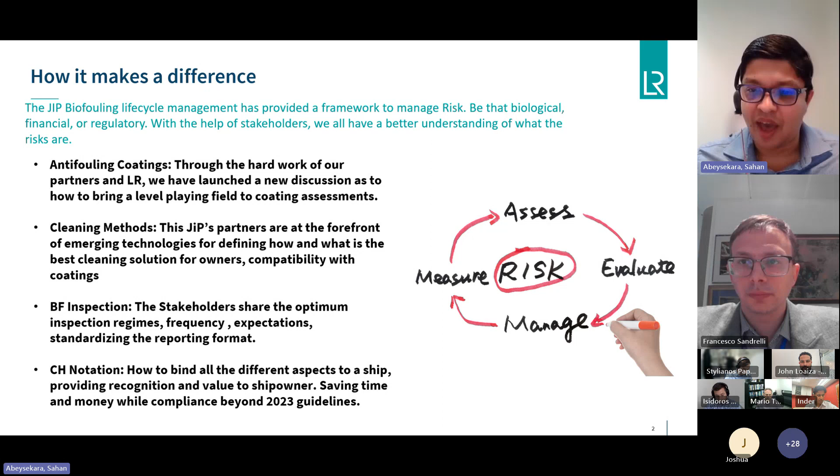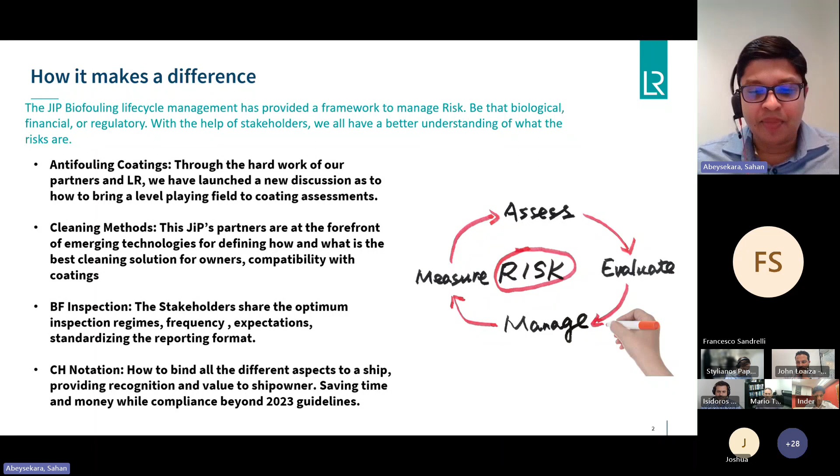That is to provide recognition and value to the ship owner for having such measures, and then to have savings in time and money. Simply put, this requirement goes beyond the 2022-2023 biofouling guidelines. To put that into perspective, a simple illustration of a ship that we have made.

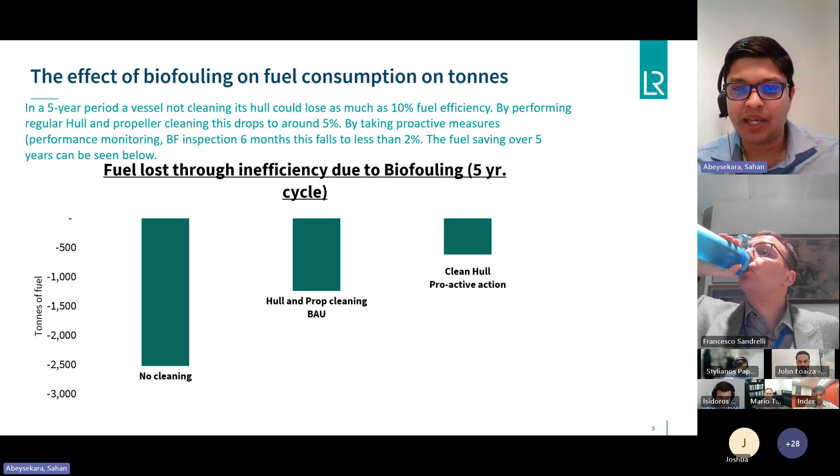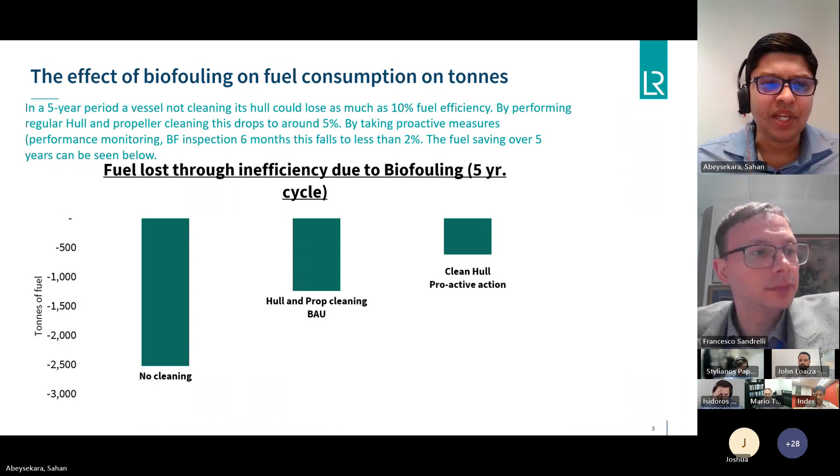This is a tanker with 9,000 tons fuel consumption per year. We mapped out the impact of no cleaning versus business as usual, which is doing hull and propeller cleaning, versus if you have a Clean Hull notation, how much you could save, and converted that into a figure without considering anything else, just totally focusing on the fuel cost.

We used a figure of around 640 per ton, and calculated how much savings a ship owner can get over a 5-year life cycle. This is excluding opportunity cost of hire and probably EU ETS payments - this is purely based on the fuel cost.

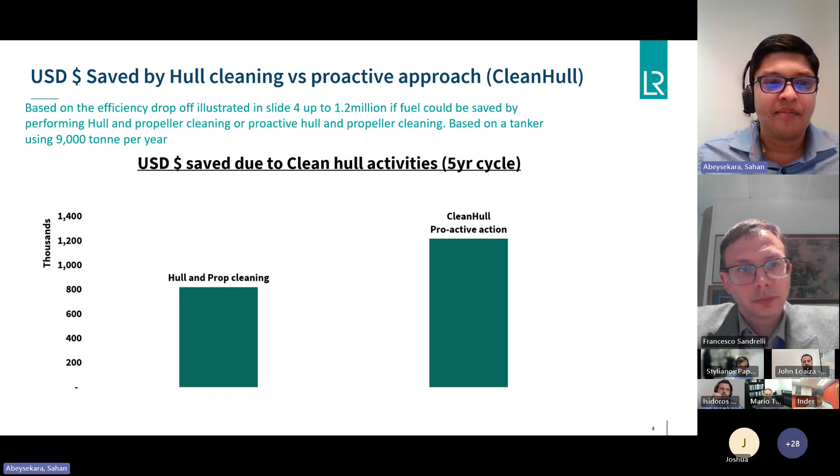Now what we want to do, which is the important part - I think Francesco wants me to share this on this platform - is what is next. So we've done the work we wanted to do and developed that process. Now we want to run it through to see what the savings are, what the findings are. So you probably understood this.

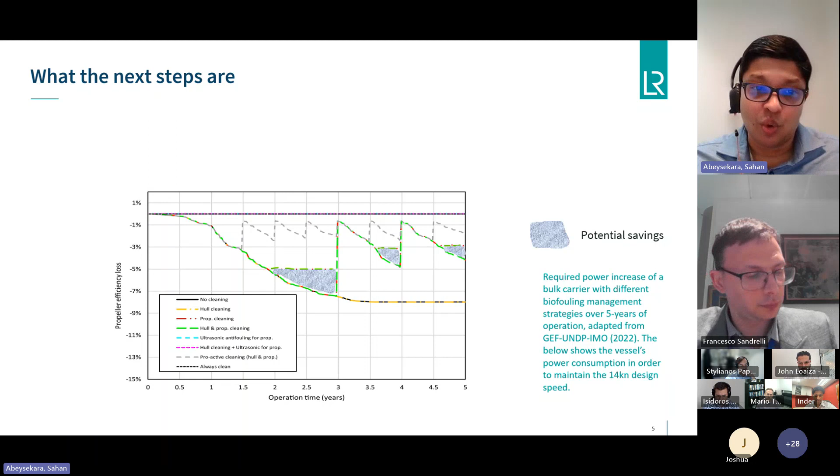So what we want to do right now is go through a trial run based on a clean hull notation, and validate this data to see how much savings you can achieve from the fuel point of view, how much GHG saving you can do, and how much compliance you can achieve from the biofouling management point of view - not just for the 2023 guidelines, but maybe going beyond to meet some regional biofouling requirements such as Australia and New Zealand.

The most important thing we want to bring up from this trial run is the importance of hull fouling and energy efficiency to the energy transition strategy, because we see lots of synergy between biofouling management and GHG emission reduction. In the energy transition strategy and going beyond new fuels, the difference hull management makes could be as significant as the difference between types of fuel, or between using battery power, a fuel cell, or an internal combustion engine.

So we wanted to bring this up to the stage that energy transition needs to take into account biofouling, and also meet biofouling requirements from the prevention of invasive species point of view. Now the trial run is open beyond the JIP partners - anyone interested in participating as a ship owner, paint manufacturer, or technology developer is welcome to contact us, my contact details are there. We want to bring this to the industry to see how we can collectively manage this challenge.

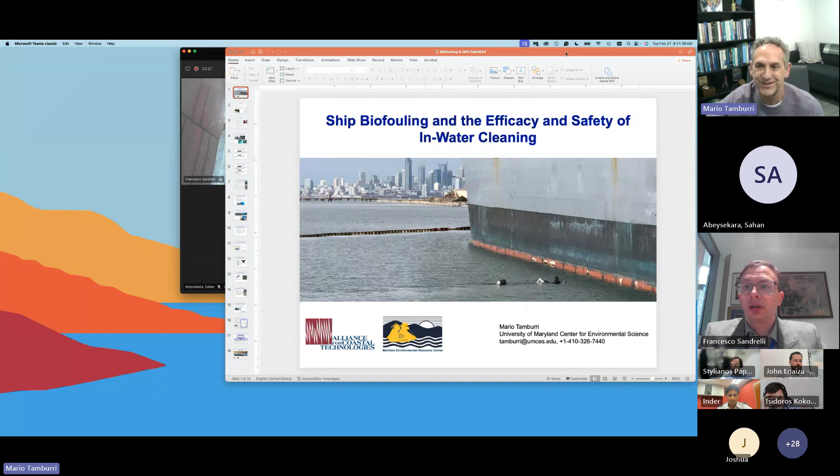Thank you, everyone, it's a great pleasure to be here. I'm going to talk a bit about ship biofouling in general terms, some background, but I'll spend most of my time focusing on work we're doing looking at in-water cleaning systems as a solution or approach to addressing ship biofouling. This work has been done under a couple of programs I run through the university.

One's called the Alliance for Coastal Technologies, and the other is the Maritime Environmental Resource Center, or MERC. But first, some background - I think most of you are fairly familiar with these issues, but to get us all on the same page, you can think about ship biofouling from two different perspectives. There's the vessel operation perspective: fouling, whether it's microfouling - just a slime layer - or macrofouling - larger organisms like barnacles - can result in increased roughness of a ship's hull, increased drag, and resulting increased fuel consumption and exhaust emissions.

Fouling can also interfere with the piping systems of ships - it can clog fire systems, cooling water systems, and the like. So it's a large operational concern that the shipping industry has been addressing for many, many years.

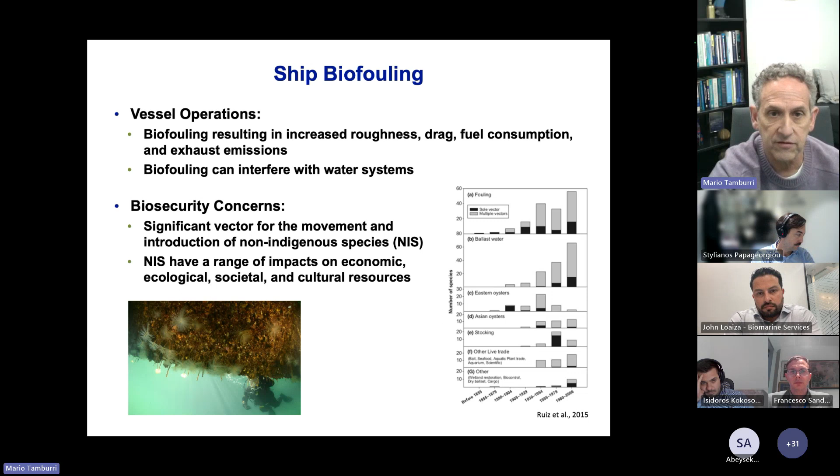The shipping industry has traditionally fought biofouling through anti-fouling systems or coatings. Most prominent now are various coatings designed to prevent macrofouling attachment, things like biocidal coatings using copper or zinc to deter growth on the surface. These biocidal coatings are probably most prevalent - around 80% of ships use those - but there are also other alternatives.

There are coatings that reduce adhesion of organisms to the surface - they're fouling release, or non-abrasive hard coatings. So organisms, if they grow there, will get sort of removed, sloughed off as the ship moves through the water. While these coatings are very effective, they're far from perfect. They typically have about a 5-year service life, but they don't necessarily prevent all biofouling accumulation on all ship surfaces consistently over time.

So there are some problem areas. Biofouling tends to increase on coatings as they age, and if ships stay in stationary locations for extended periods of time, if they're at anchorage or they're laid up for some periods. There are also substantial areas on the ship that are more prone to fouling, and that's because they cannot be painted, things like anodes, or they're more prone to damage or scuffing, like the bulbous bow or tug and fender points and anchor chain areas and so on.

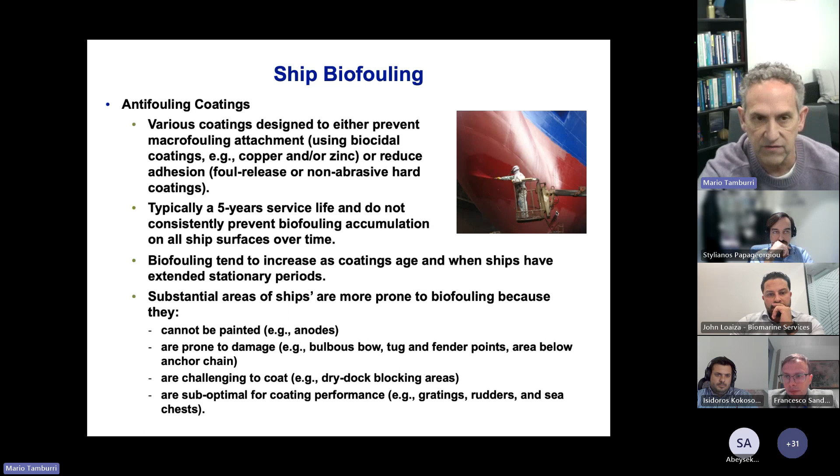So because of these limitations, there's been a lot of effort of ways to augment the coatings, make better coatings, or something else we can do in addition to just the 5-year coating cycle. And that's where in-water cleaning comes in.

In-water cleaning of ship biofouling has a long history. You could argue that in the wooden sailing ship days, we did in-water cleaning through careening. They would pull ships over on its side and scrub the organisms off the bottom of the vessels. Of course, with the advent of steel ships, this became challenging, but there were still attempts to, at the least, scrub organisms off the side of ships at the waterline.

With the advent of scuba, access to the hull became a lot greater, and so there were very simple scrubbing and scraping approaches done on vessels, and that evolved into more mechanized sort of cleaning with a spinning brushes kind of approach.

It became apparent, though, as we moved into these sort of cleaning operations underwater, that this might have problems associated with it. These organisms we're knocking off might themselves be alive and cause invasions. And by doing this, we might also be releasing some of those biocidal materials like the copper and zinc I mentioned earlier into the environment, which could cause problems.

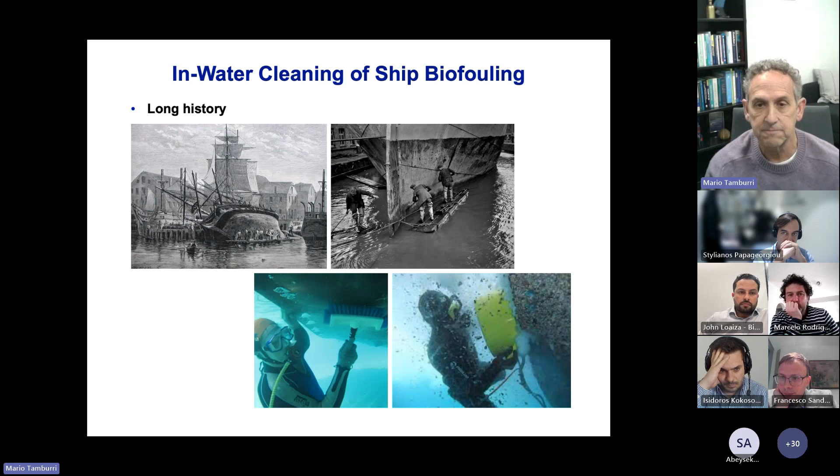So this has led to what I like to refer to as a new generation, or next generation, of in-water cleaning approaches, technologies, and systems that are designed to be a bit more sustainable, perform the function while being less impactful on the environment. And you can think about these in-water cleaning systems as a continuum, but there are two ends of the spectrum.

On one end of the spectrum is what we call reactive in-water cleaning, to remove existing macrofouling - again, existing large organisms like barnacles and macroalgae or mussels and the like. So you're reacting to when they're already there.

And this approach is now being morphed into cleaning with capture. So what you can have is a cleaning unit that has spinning brushes or water jets. It can be remotely operated or diver driven. And these things typically have a shroud, a skirt around the outside of it, to entrain all the material being knocked off the ship, and then some sort of suction approach to bring that waste material, that debris, to the surface for processing, where the solid material is brought off to a landfill, for example, and only clean water returns back into the environment.

On the other end of the spectrum is what we call proactive in-water cleaning, sometimes referred to as grooming. And this is to prevent that macrofouling from establishing. And you do that, again, through a cleaning cart. Again, it can be ROV, it can be diver driven, it can have spinning brushes or water jets.

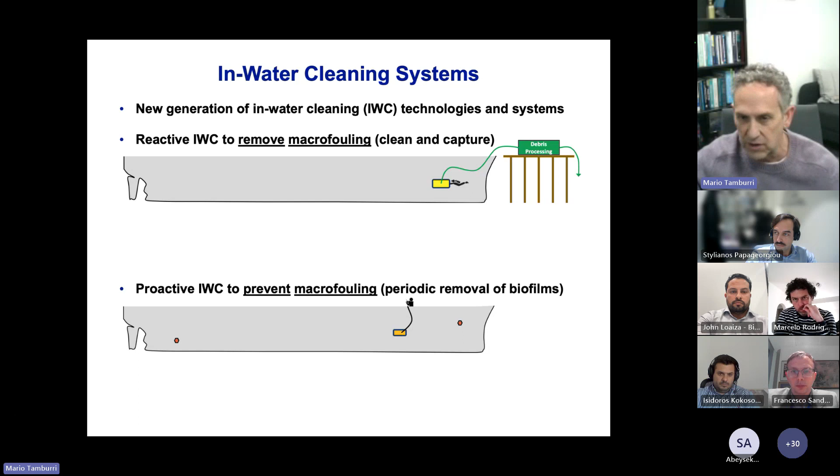But what our real questions have been over the last few years is how effective and safe is this activity? How effective are they at removing macrofouling and capturing that material safely? How effective are these proactive systems at removing biofilms and preventing macrofouling growth? And in both cases, are there any measurable impacts to the environment, to the water quality, or to the coatings through these activities? You don't want these activities to actually reduce the life of the coating, for example.

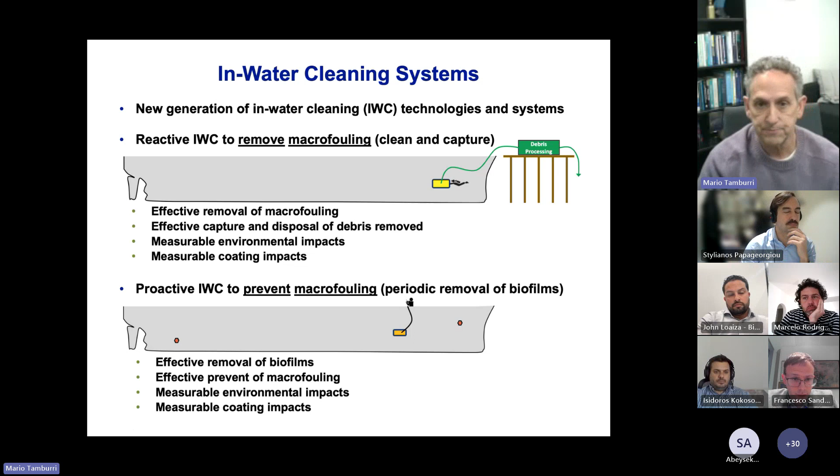This is all happening in the context of lots of new regulatory activity bubbling up. I think you're probably familiar with many of these. These are just some examples, and I won't go into great detail on all of these, but it's getting a lot of attention now in the regulatory world. Of course, we already know about the IMO guidelines that were updated from 2011 to last year, when they were finalized.

Just last week at IMO PPR 11, it was agreed to start a correspondence group focused exclusively on in-water cleaning to provide guidance on in-water cleaning activities. But we know about the New Zealand rules, and we know how ships are getting turned away. Canada has guidance out there for a couple of years now on how they propose to do in-water cleaning safely. Australia is coming out with rules soon, we keep hearing.

In the U.S., under the Vessel Incidental Discharge Act, the EPA and the U.S. Coast Guard will be addressing fouling and in-water cleaning. California has its own set of rules. Even individual ports, like this example of Port of Bremen in Germany, have rules around what you can do. They say you can only do proactive cleaning, so no macrofouling removal on non-biocidal coatings. This is evolving. There's more coming out, but this just gives you a feel that it's getting a lot of attention from the regulatory perspective as well.

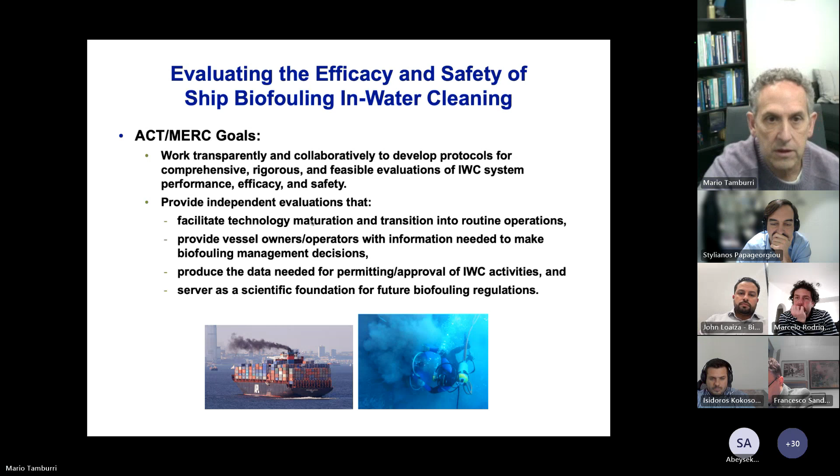We've been doing this not only by developing these protocols, but by trying them out to see if they work. We don't want to come out with recommendations that fundamentally don't work. So we've been testing systems, both to help them mature and perhaps get approval for use, but also to help develop these protocols and methodologies.

They started back in 2018 with a test of a reactive in-water clean and capture system. You can kind of see the layout here. More recently, we tested a proactive in-water cleaning system back in 2020 and 2021. You can see the little cleaning unit going down the side of the ship here. And we have an ongoing set of tests now on a second proactive system.

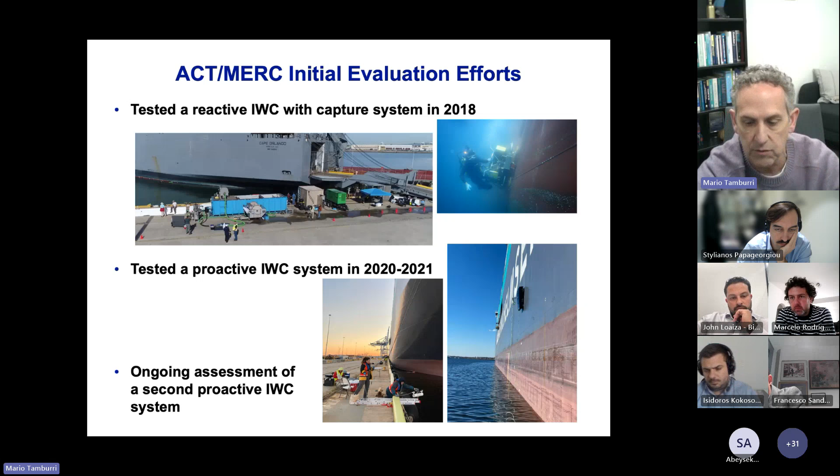Of course, we want to do independent, qualified testing - that goes without saying. But we also recommend that we stick with quantitative, robust, statistically sound data rather than qualitative observations. An example of that is you'll hear things like, well, we don't want any observable debris plumes behind the cleaning unit. That's important information, and it's worth documenting if you see a debris cloud around the cleaning unit, but it's not quantitative. We don't know what that means. It's highly subjective - how far away are you from the observation, how clear is the water?

So we want to focus on measurements that we can get sound numbers to make sound assessments of the systems. That includes water quality sampling at crucial control points to understand what the impacts of the environment are. Is there a release of harmful material, both dissolved and particulate, into the environment? I'll give examples of that in a moment. We also need to focus on measurable protective endpoints rather than a percent reduction, and I'll explain what that means in a minute. Finally, we recommend that we want to stay away from understanding whether the species we're taking off a ship is native or non-native, whether it's viable or non-viable, and I'll explain why that's important as well.

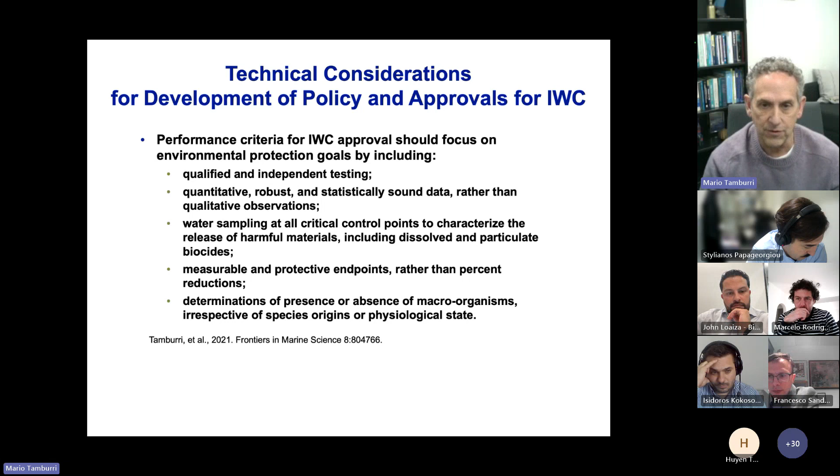So first, on understanding the impacts to the environment, we propose that you need to really focus on whether water quality is changing at a cleaning event compared to background conditions. Where you want to sample depends on the type of system you have. If it has treatment, waste collection, debris processing, and so on, you can sample before and after treatment. But you really want to look at the cleaning unit itself, what it's doing to the local environment, and compare that to background. This is just an example of one of our tests.

This is on a proactive in-water cleaning system without capture. We had a sample hose that collected water right above the spinning brushes, so we could see if it was having any impacts. We also measured the background conditions, in this case of dissolved copper and particulate copper, but there's a variety of variables you can measure. We sampled a day before the cleaning event, 2 hours before, 2 hours after, and a day after the cleaning event to capture what the background levels of particulate and dissolved copper were.

Then we sampled background levels on the side of the ship, but a long distance away, so it wasn't impacted by the cleaning during the same time as the cleaning event—that's these blue dots here. Finally, off the cleaning unit itself is the purple and green dots. Green dots are when the cleaning unit was stationary and not cleaning. Purple was when it was cleaning.

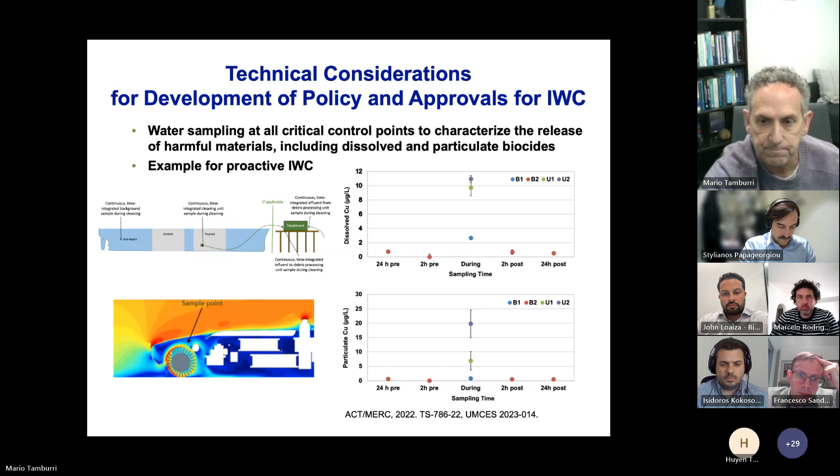I also mentioned that we should focus on measurable protective endpoints rather than percent reduction. This is an example from the reactive system that we tested. Don't worry about all this data, it's really complicated. I just wanted to show it to emphasize that this is a log scale for dissolved and particulate copper. This gray area is the amount of that dissolved and particulate copper going into the waste processing unit.

What I want to emphasize here is that there was quite a bit of copper going into the waste processing unit. If you ask for a percent reduction—say that system to remove 90%, 95%, or 99% of that copper material—you're still ending up with quite a large amount of copper going into the environment. So for percent reductions, if you start with a really high number, it's not necessarily protective, even if you go down to 99%. So we want to avoid this percent reduction approach to regulating these activities. This is true also for the amount of biofouling on the side of a ship. If the ship is heavily fouled and you say remove 99% of that material, that last 1% can still pose a significant biosecurity risk.

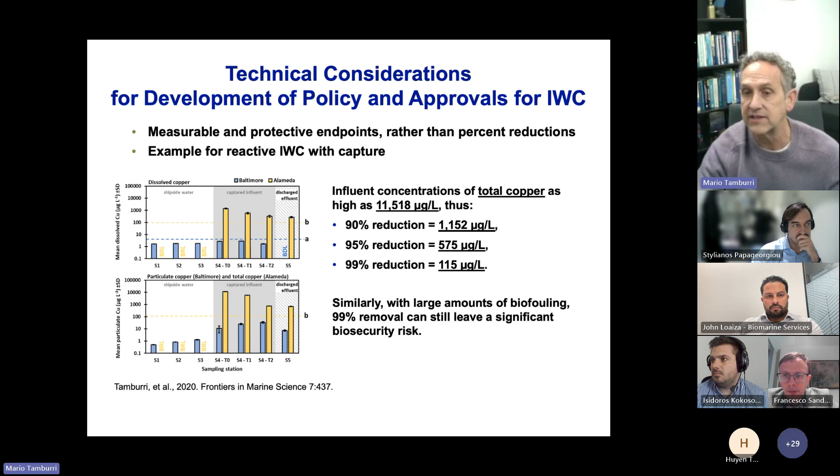There's been a lot of discussion around these systems needing a capture efficiency rate, or a percent capture rate. The problem is, in theory that sounds like a wise idea, they should capture a certain percentage of material removed from a ship, but we can't measure that.

Here's why: we can estimate the percent cover and types of organisms on the side of a ship, but we can't measure the amount removed. So to understand percent capture, you need the mass captured, and we can measure that—how much is sent to a landfill, for example. But we don't know the mass removed.

For the mass removed, we need to know how much was on the ship before cleaning, and how much remained after cleaning. These are numbers we simply can't generate. It also needs to be noted that the mass will include not just biofouling, but possibly coating material and material from the in-water cleaning itself, like the wearing of brushes. So it's a great concept, but something we can't measure in any reasonable way.

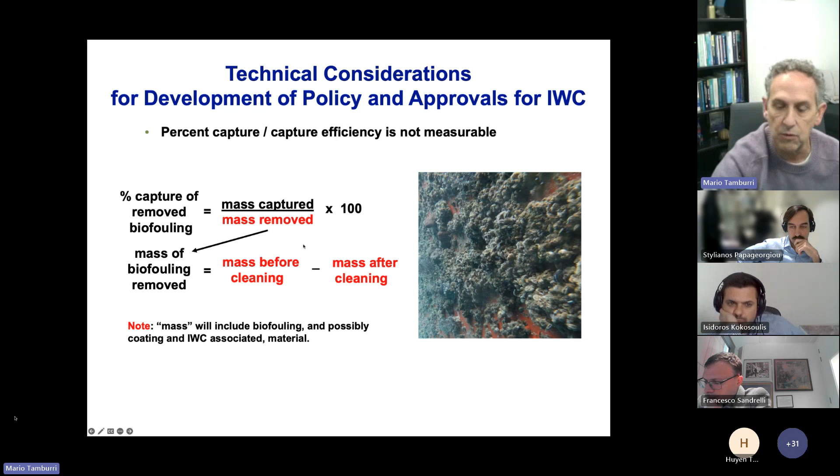Let's not get too tangled up in whether these are native or non-native organisms we're cleaning. Are they alive? Are they viable? Are they dead? Those methodologies are something we went through when testing ballast water treatment systems, and it's a very difficult mess. These methodologies are challenging, expensive, and often error prone. So we recommend staying away from those sorts of analyses.

We should really focus on presence, absence, and magnitude of macrofouling. When it comes to biosecurity, the most conservative thing is to assume all these tube worms are alive, and you don't want any of them there. From a ship operational perspective, it doesn't matter if there are live tube worms inside these cases or not—this is roughness and drag, so you don't want them there.

Finally, if there are concerns about water coming out of treatment of waste, and you want all those organisms dead or rendered inviable, again, don't get into the ballast water treatment system world. Focus on things like the dose of your treatment, exposure time, and don't worry about analyzing individual organisms, because it's a difficult and often uncertain proposition.

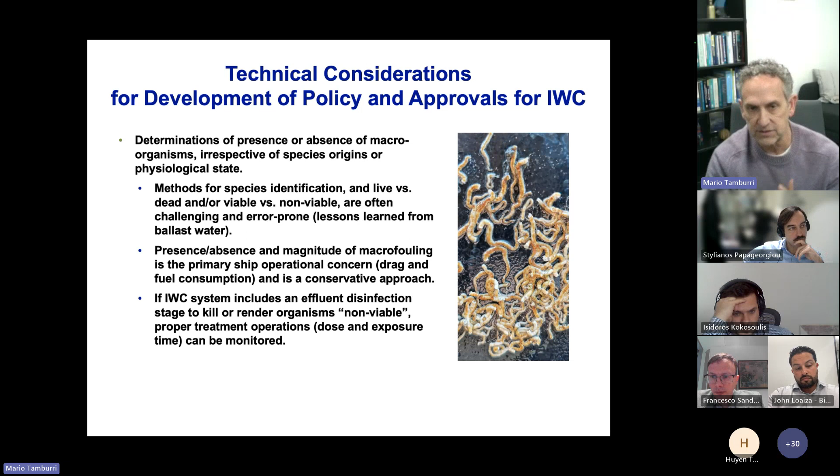When thinking about possible harm to the environment, there are ways of measuring this that are really feasible and straightforward. We want to focus on whether you're elevating these conditions above the background. Port environments are typically compromised already, far from pristine, so measure the background and then see if you're getting significantly above that background when doing your in-water cleaning.

For the biofouling organisms, we can measure proxies—we don't have to measure the organisms directly. We can measure things like total suspended solids, particle size distribution, particulate organic carbon, and dissolved organic carbon. If those are elevated above background levels, you can say there's likely organisms being released into the environment. If not, you can say the capture is working really well.

We want to focus on biocides and coatings as well. You want to measure both the particulate and dissolved components because they can both increase due to in-water cleaning, but those are direct chemistry measurements, straightforward. Finally, we also have to remember that coatings have large amounts of polymers as binding agents, and polymers are plastics. So we also want to measure microplastics in the environment, background versus what's coming off during cleaning operations, to make sure that's not increased as well.

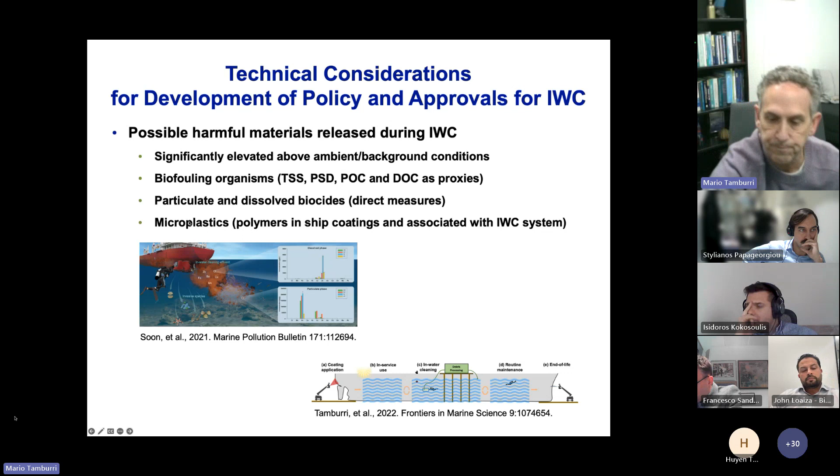All of that information, all that work, all our colleagues from around the world helped contribute to a document we put out in 2022: the ACT and MERC Guidelines for Testing In-Water Cleaning Systems. It took two years to put together, but what we're trying to do is put out a procedure that tells us how to test these systems in a standardized, robust way.

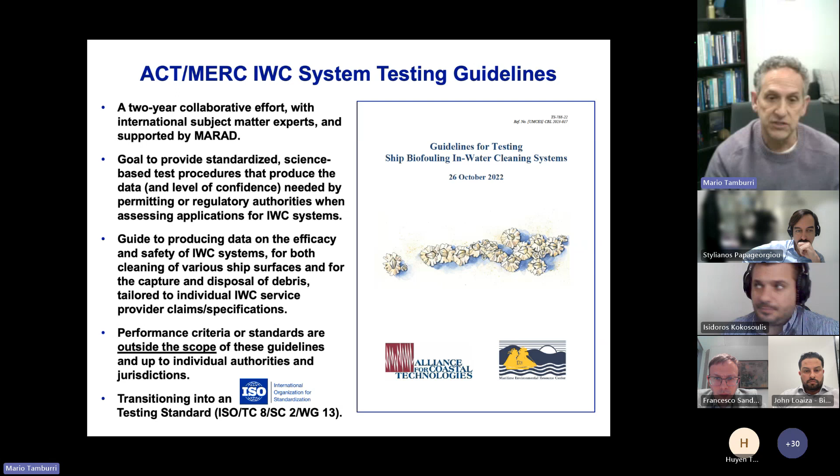It's meant for all types of in-water cleaning: proactive, reactive, with or without capture, things that clean hulls, things that clean niche areas—it's all covered in this document. What's not in this document is the standard, performance criteria, or requirement. That's up for individual authorities, administrations, and jurisdictions to decide. We tell you how to measure it, but others decide what's good enough or not. What's happening now is this document is being turned into an ISO standard.

The ISO, International Organization for Standardization, has a committee on ship and marine technologies, a subcommittee on marine environmental protection, and we developed a working group 13 on in-water cleaning of ship biofouling. There are two projects, so two standards being developed under Working Group 13.

ISO 20679 is what I just was talking about, the testing of ship biofouling in-water cleaning systems. That standard will probably be out by the fall of this year. ISO 6319 is a broader document on best practices for performing and documenting in-water cleaning operations. It will probably be finished by the end of 2025.

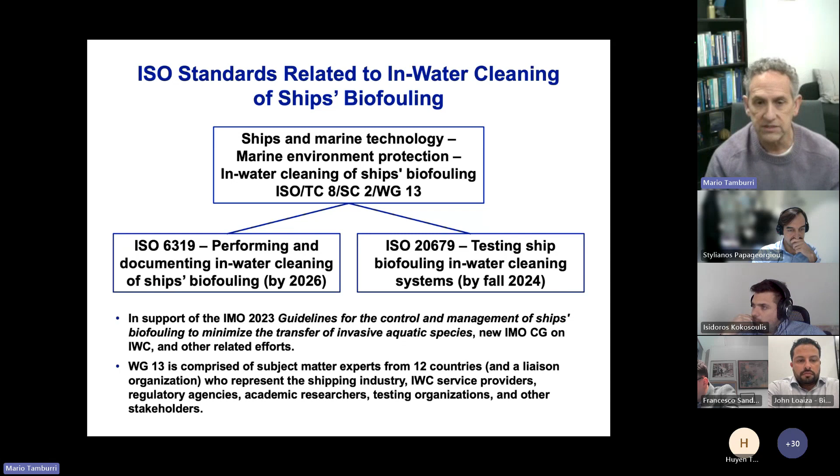Both of these are designed to help the IMO process going forward, especially the new correspondence group that's been established, but also to help support everyone, whether it's the private sector developing these technologies, administrations trying to approve their technologies and the like. The working group has experts from around the world representing the shipping industry, in-water cleaning service providers, agencies, researchers, testing organizations.

I'll start by telling you a little bit about who we are and what we do, and why we met Inder and liked him. So Lomar Labs is part of a privately owned group called the Libra Group, which is active in 20 different industries, including maritime, where our most known brand is Lomar. Lomar Shipping has been around for 50 years, and as of last year, we've launched Lomar Labs.

Lomar Labs is a venture lab. I used to be the technical director of Lomar, have now moved on to run Lomar Labs, which is a place where we can experiment. Our mission is to accelerate the deployment of maritime deep tech, mostly around the push to decarbonize the industry and the push to automate the industry.

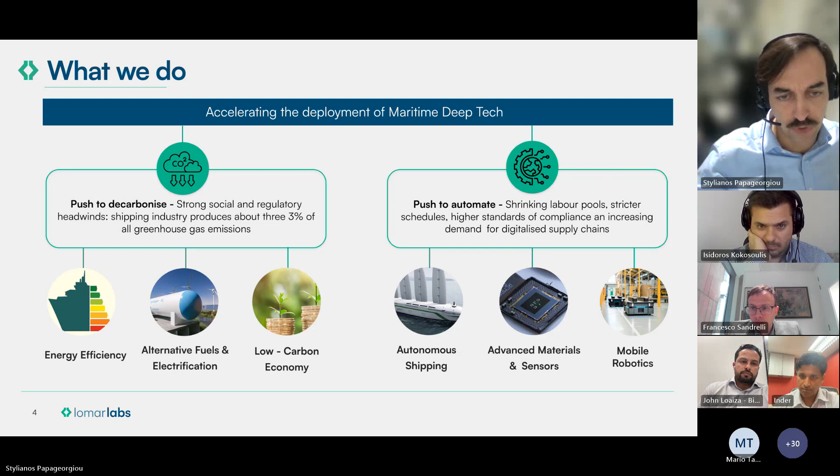And we're looking at all sorts of different technologies, mostly working with startups that are evolving new tech and helping them make ways into the industry.

How we do it is that we've basically offered our fleet of vessels as a live testing bed, a floating lab for startups to test things. We make sure they do this safely, working with class, with insurance, and other regulators, including FLAG. But in the process, we de-risk technologies, we validate the business model, make sure it's workable from a ship owner's perspective, and then we help them go to market.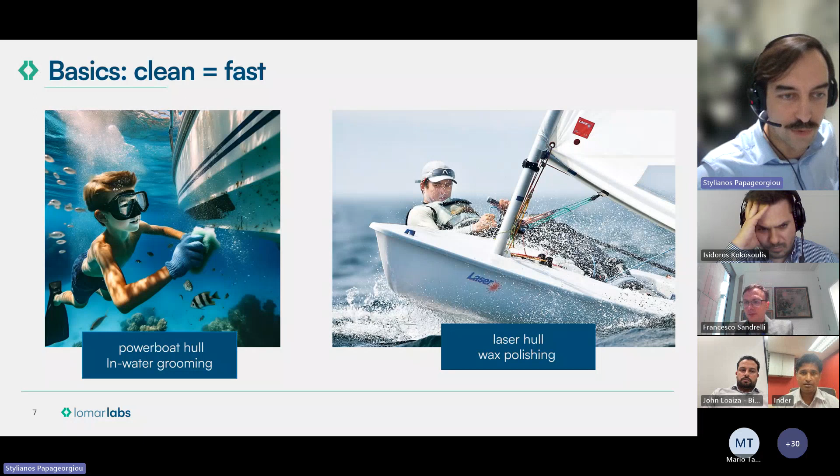And I could see the fouling growing really quickly. Like a week in the Greek islands was enough for fouling to start develop. And I had this firsthand experience of seeing slime grow, and it was quite easy to remove. But if you left it for a week, then it wasn't easy to remove anymore. So pretty early on, I had this concept that frequent cleaning is important.

When I joined the industry in 2004, it was just before the banning of TBT, and I actually attended a dry dock as a young trainee superintendent, and everyone was talking about a tie coat and the TBT-free paint. I didn't have a clue what they were talking about, but eventually it started clicking.

And what I saw there was that from there on, fouling became an issue. But up to that point, no one had really worried, particularly at least from within a shipping company. So we would manage ships and not worry too much about fouling because that stuff was toxic, the TBT paints. So there wasn't any fouling and there wasn't anything to worry about in terms of biofouling management.

But in my career, since starting and until today, I've seen that ships progressively get more and more easily fouled. In terms of numbers today, we're probably over-consuming as an industry some 37 million metric tons of fuel because of fouling. Do the math, that's like 100+ million metric tons of CO2 that's been emitted that doesn't need to be there. Plus all the problems just discussed by the previous speaker on invasive species being migrated.

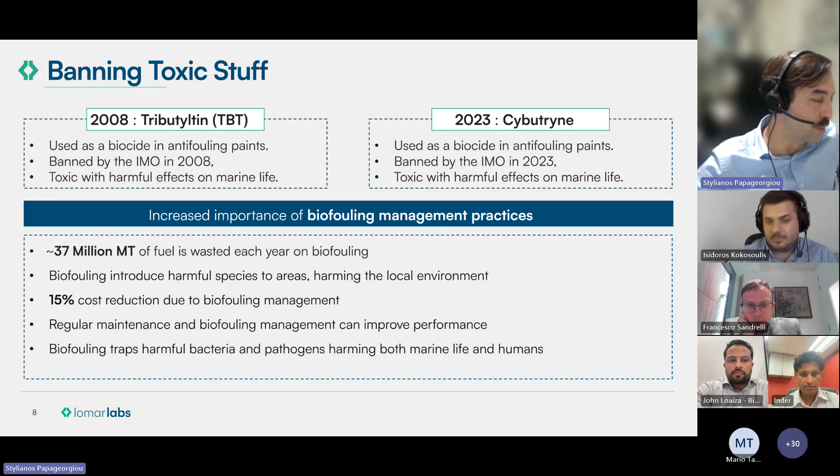And so it's a big problem and it's becoming bigger, and we haven't historically dealt with it, at least thinking about recent history. From operating Lomar's fleet, which at some time was numbering 100 vessels, I had fair exposure to typical do's and don'ts with running biofouling management operations. So very simply, I would say keep the vessels moving, don't stay idle, because our coatings are meant to self-polish when the ships move.

Obviously, keep out of warm and nutritious waters, because that's where fouling develops faster. Some paint suppliers have services where they can give you risk assessments depending on where your ship is trading or anchored and how likely it is to develop fouling. Useful tools, but you should still monitor your hull fouling.

This is our number 3. What you see here is a drawing or a graph from our performance monitoring system at Lomar. We collect noon data, get it analyzed by a third party who provides us with this kind of graph, using an ISO curve to plot the purple line, which is the hull fouling added resistance to the vessel. This is a bulk carrier that we've had from new building. It was launched in...

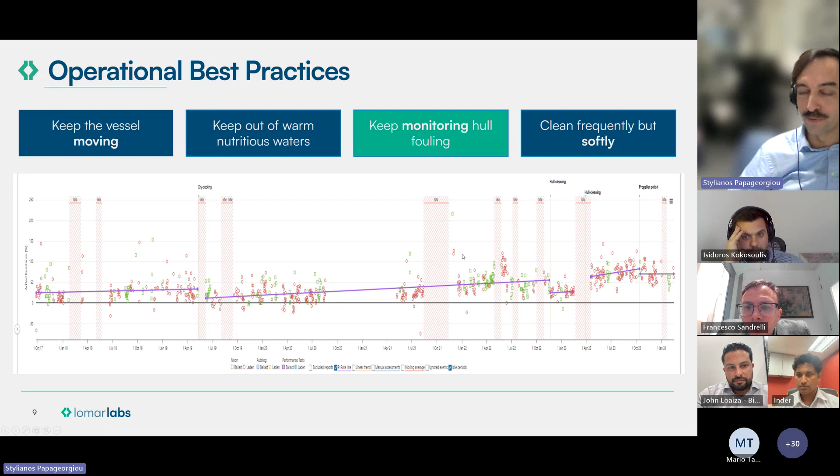But one lesson here is that cleaning frequently but softly helps. We had vessels trading in nutritious water in the Pacific, where we would clean them all the time, and there was no paint left by year 3, and we still had 2 years of operation before first special survey, and no anti-fouling left. And that's where problems get even harder to manage.

But yeah, in terms of obstacles to these good practices, diver-related issues is a big one. I've broken them into 3 categories here. One is around availability. You don't always find them where we want them. We don't always find them at a price we want them, and they're not always available on the days we want them, or we just don't have the days, despite them being available. They're always not reliable.

There's, of course, very good, very professional divers, but there's also not so professional divers that will use the wrong types of brushes and harm the paint, or will just simply clean a part of the vessel and not the whole thing and get paid for the whole thing.

And then you've got constraints around safety, where there might be poor water visibility, too strong a current, the draft is too big, the divers can't get there, or there's just other work going on board, like main engine maintenance. And then you won't allow divers to go anywhere near the propeller because that's dangerous to them. And given the choice of fixing your engine or cleaning your hull, you will always fix your engine and not clean your hull. Then you run into local restrictions where, for preventing invasive species, you might be banned from cleaning your hull in a particular anchorage or port.

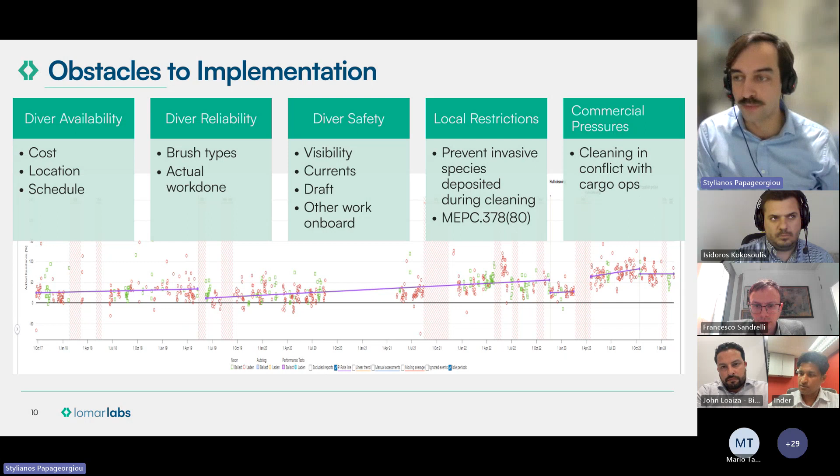These are very typical problems that a lot of members have met. But from my perspective, it was always around: how do we move forward? How do we push the envelope and overcome these problems and come up with a better solution?

Mario mentioned a bunch of different paint systems now available beyond typical self-polishing anti-fouling. I'm particularly interested in nanotechnologies and fouling release systems that are permanently there, permanently prohibiting organisms from growing and keeping the hull sleek.

But you can't apply them everywhere, and even with those coatings, from what we hear and see, they still get fouled. So they need help. One way of helping them is with ultrasonics.

You can basically kill the organisms through ultrasonics, but the transducers and the whole system to do this are quite expensive, so it doesn't necessarily make sense to cover the whole ship. You can still use them to cover niche areas like the propeller, sea chests, and the rudder. Propellers are quite easy to do - you fit the sensors on the tail shaft on a ring, and it protects your propeller. Same with the sea chests.

Then we're looking at grooming systems, where putting a robot will be safer, more efficient, and not limited by availability and conditions compared to diving. So we're looking at: let's put these things on board. What do they need to do to work properly?

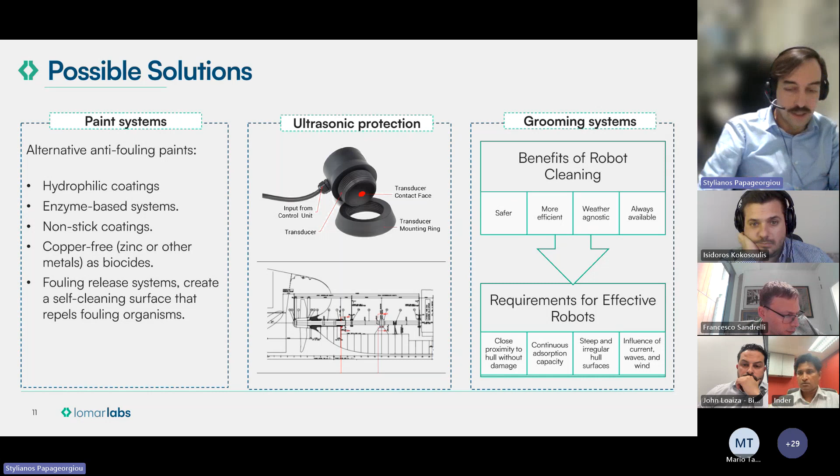The vision is to have a ship that has zero fouling with no biocides and no downtime. That's our holy grail as a ship owner.

We think we can get there by using a combination of ultrasonics to protect propellers and sea chests, hull coatings that are permanent, free of biocides, hard, and just need regular grooming. That's where the grooming robots provide the solution. We can find autonomous, inexpensive, and permanently on-board robots that provide, in combination with these nanotechnology hull coatings, a system rather than one thing, that provides a clean and sleek hull coating.

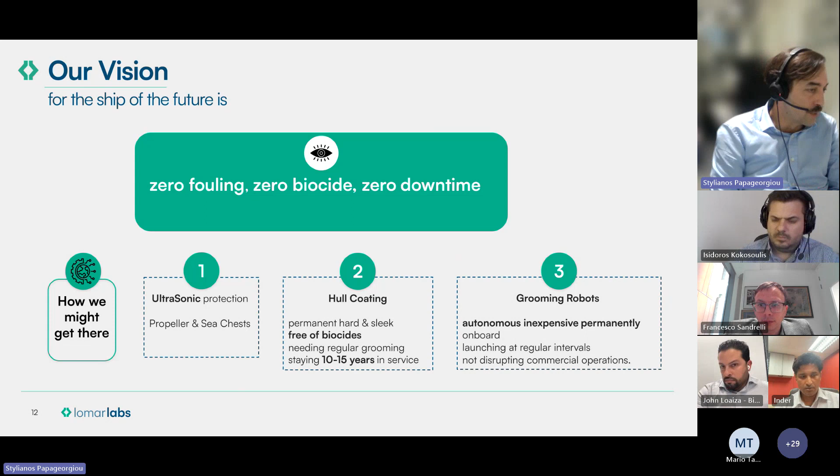So we've been experimenting, and this is where we met Inder and Alicia Bots, who may take the floor now and tell us what he's been doing.

Thanks for the introduction, Stylianos. My name is Inder, I'm the founder at Alicia Bots. Alicia Bots is a maritime robotics company focused on building underwater autonomous vehicles for inspections and cleaning.

Coming to the subject of hull grooming now, as Mario also mentioned, hull grooming here refers to proactive in-water cleaning methods at a microfouling level, as defined by the IMO - basically cleaning biofilms of slime, or maybe just a 1mm layer of algae at maximum. On the left, you can see an image of what we're referring to as biofouling.

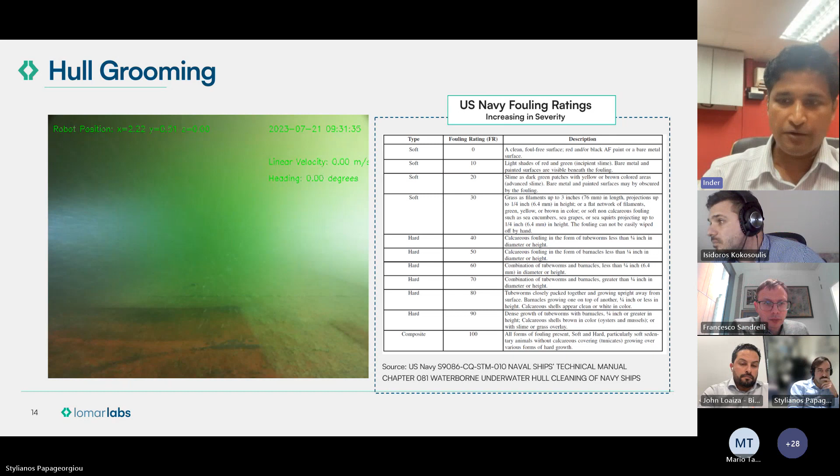So at Alicia Bots, we built a magnetic wheel drive robot, which moves around the ship's hull in a semi-autonomous way. It's lightweight, weighs only 25 kgs, and is equipped with mild nylon brushes on the forward and aft of the robot, specifically for the purpose of grooming.

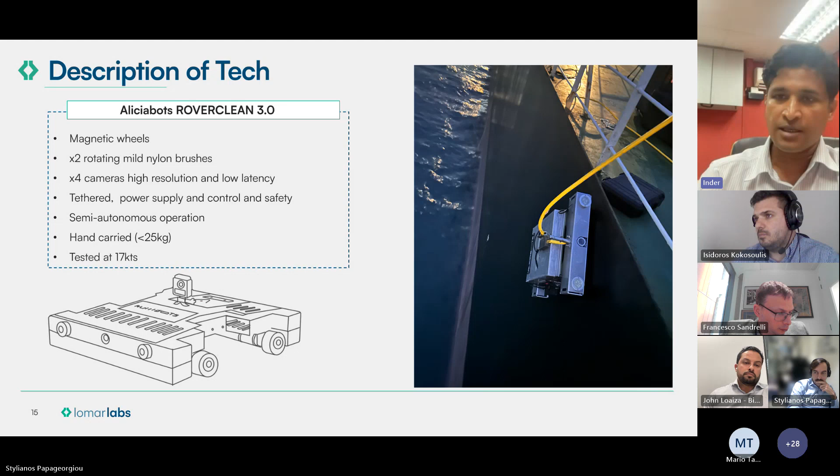It's not designed for cleaning any heavy fouling. It's equipped with 4 high resolution, low latency cameras, giving a 360-degree view of the hull for the operator, which can also be live streamed back to the office if there's reasonable internet connectivity. You can do this while the ship is sailing, preferably less than 11 knots, but it's been tested to work satisfactorily at speeds up to 17 knots.

Here's an example where we deployed on the Lomar fleet. We usually spend around 8 to 10 hours with the crew, training them on deployment and operation and control. In the first attendance, we also mapped the ship's hull with the robot and defined some semi-autonomous paths, like a waypoint navigation system, for the robot on the ship's hull.

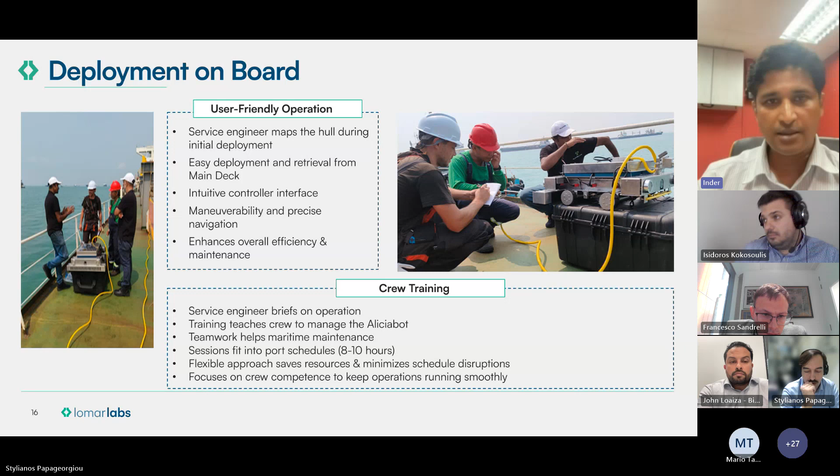This approach, with the crew deploying as and when required based on their operations, means minimum disruption to ship operations as well as minimum downtime, and the crew has the flexibility to do it as and when they require. Here's a short video of how our robot performs the grooming action.

So all these green patches are basically a 2mm layer of grass on top of a layer of slime. The robot's mild nylon brushes effectively remove this kind of biofouling.

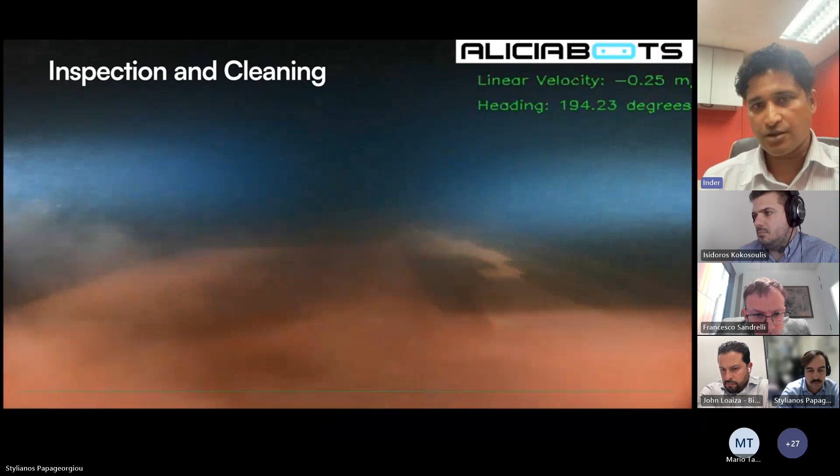The cleaning span is almost 1 meter, so it cleans a 1 meter lane, then changes lanes and comes to the second lane. This way, for a Panamax sized vessel, it takes anything between 6 to 7 hours to complete each side.

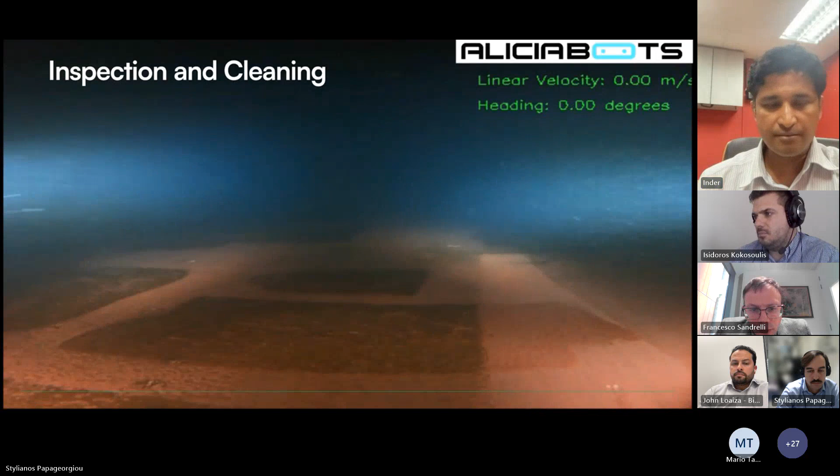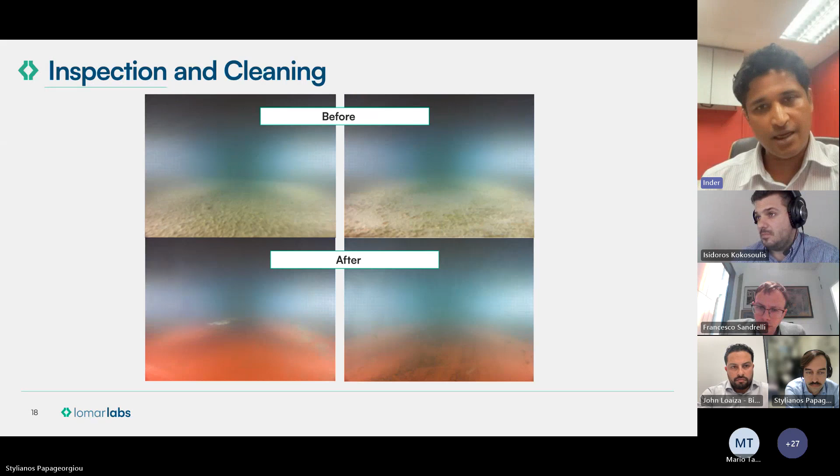As our next steps, in the next course of action, what we are trying to achieve is fully autonomous operations with minimal crew intervention, so that the robot can be just kept in a designated place, and it can operate on its own, navigate on its own in the entire hull, and come back to the same place.

We are also looking forward to collaboration with various paint manufacturers, as well as biocide-free paint manufacturers who provide these hard coatings, who probably would require proactive grooming. I think with such a combination, we would have better fuel performance, longevity of the hull, and extend the life of the paint beyond the docking cycle in some cases.

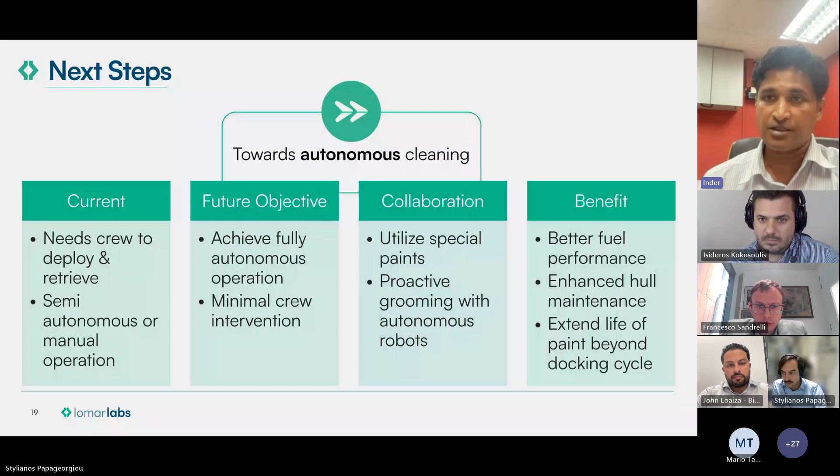Over to you, Stylianos. So I'll jump in here. This is one of the latest things we've done with Inder, and we had this vessel that was new to the fleet of Lomar. It was taken straight to the dry dock, and we painted the vessel with a regular anti-fouling paint, but we also made 2 test patches from unconventional paint suppliers.

You wouldn't think of them as your first source for an anti-fouling coating, but these are hard permanent coatings that are epoxy based or glass flake, and the idea here is to test how these coatings can be kept clean in combination with a robotic grooming system permanently living on board.

So we will see. This is just before Christmas, and we are now testing how this will develop over time.

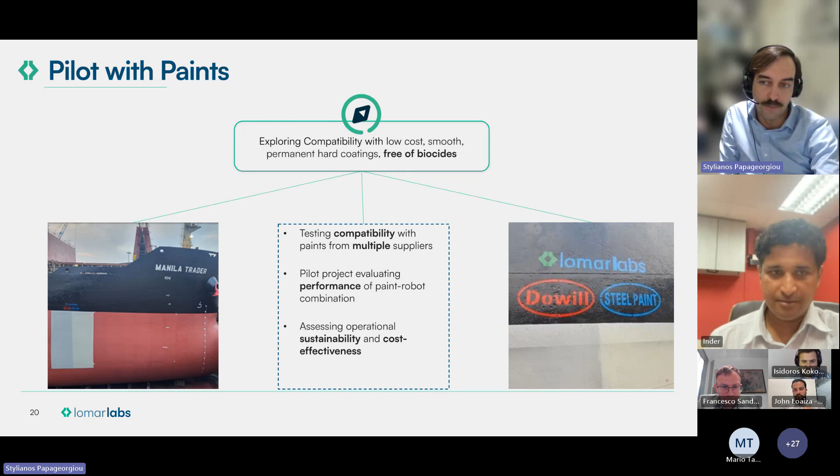But the vision is to have these robots on board as another type of R2-D2 for those Star Wars fans, that can autonomously go overboard and have a look or clean things, and keep the crew hands off in terms of maintaining, on a routine regular basis, those new types of paints clean and performing.

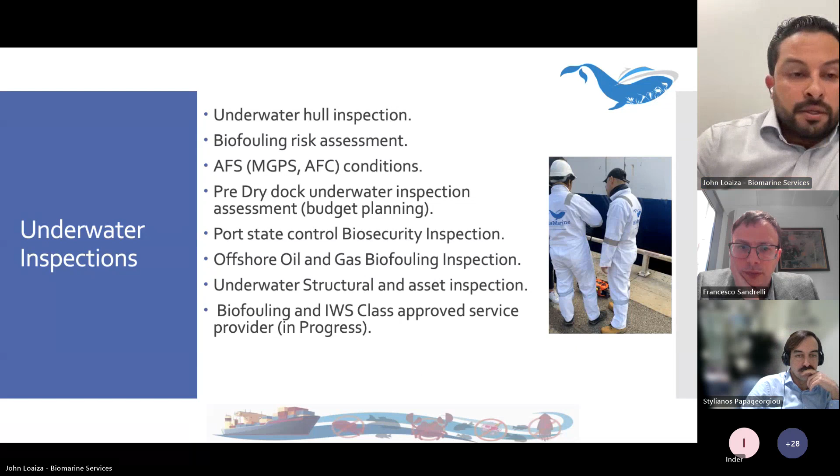So what is the idea behind Biomarine Services? We use one of the best ROVs in the market for hull inspection.

We have a biosecurity platform where we fill up all the reports for the different areas of the ship, whether it's the hull, niche areas, and also will include in our platform the marine growth prevention systems, their conditions, and the assessment. So it's not just focusing on the biofouling inspection, but also the different areas that apply for biofouling control and management.

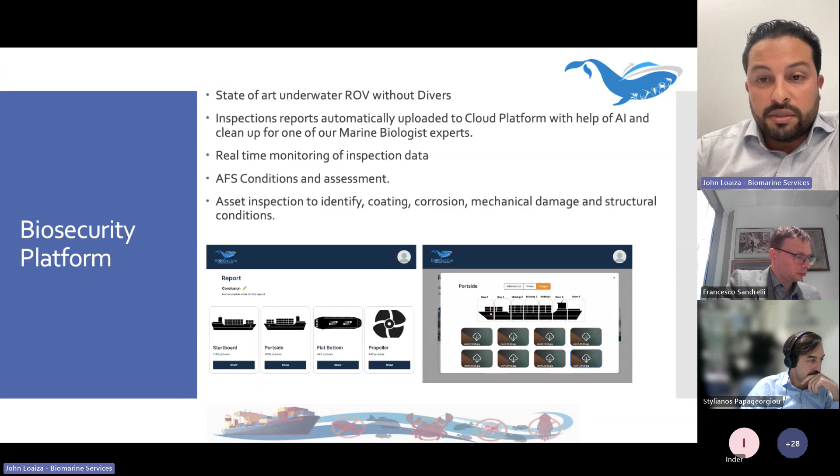As everyone knows, biofouling together with ballast water is one of the major vectors of invasive species, and it's in areas that we focus to operate.

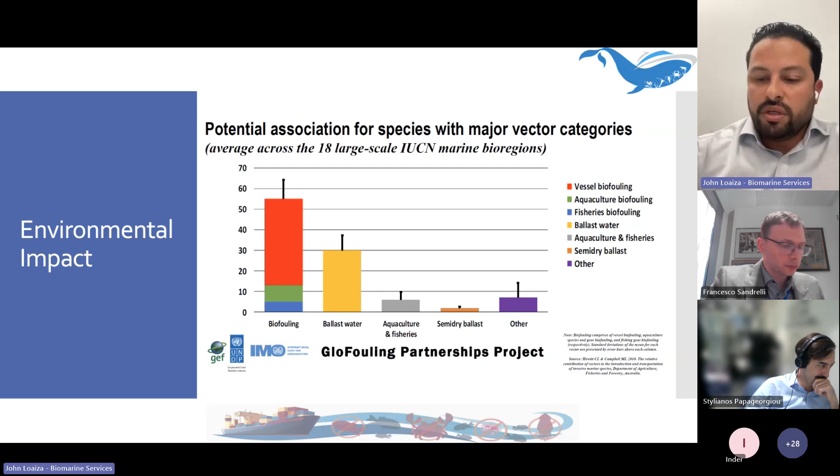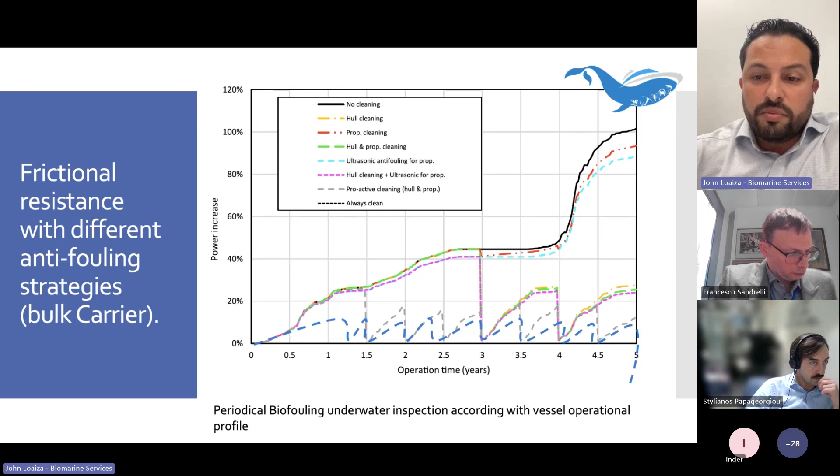Nonetheless, if you do a periodical inspection according to the operational profile of the vessel, you can find and make some savings. Also, by identifying which areas of the ship create more biofouling and when, and how to clean the hull and niche areas, and also to inspect your marine growth prevention systems.

Biofouling creates a bigger drag of the ship, also creates a cost for fuel efficiency. As shown in this graph, you can see a total cost.

This was done for the operational profile of one bulk carrier. But this is only one example that shows the increase of fuel consumption. And this can vary even for sister vessels that operate in different areas. You can apply the same biofouling strategy, but probably two vessels that operate similarly can still vary between them.

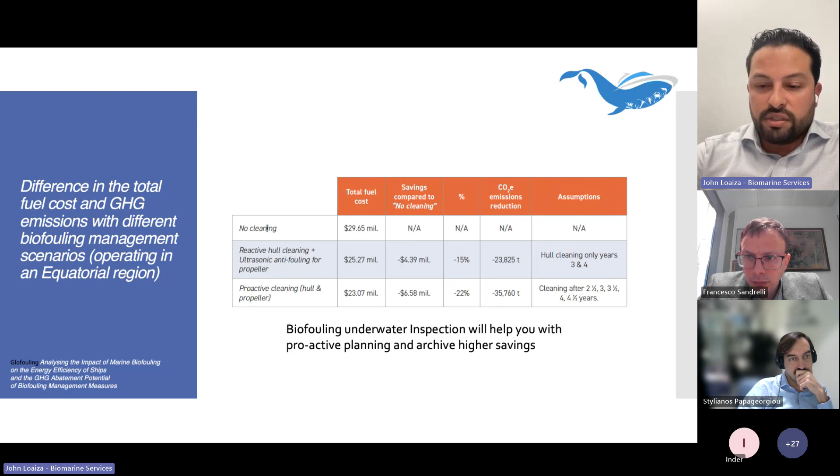This is because external factors can affect the hull performance, not just with the similar biofouling strategy. So we can just jump this one.

So what is assessed during the inspection? The biofouling impartial inspection. We report approximately biofouling rating levels on the hull section and niche areas, and the functionality of the marine growth prevention system installed on the ships.

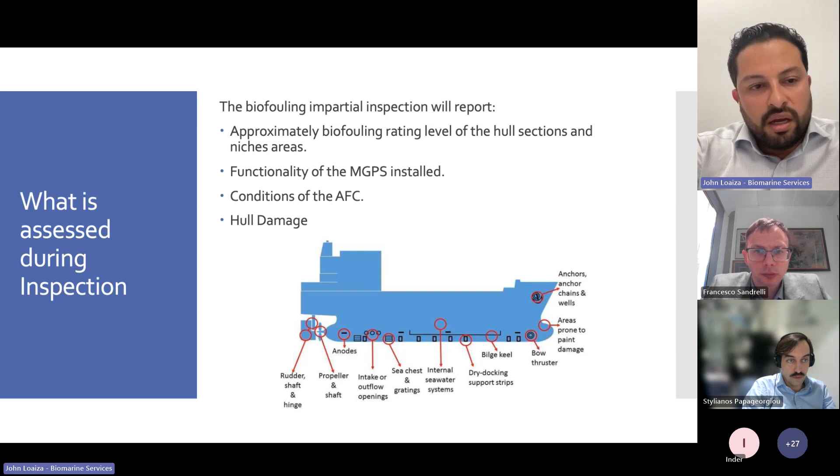There are different technologies, UV systems, ultrasonic systems, and also the condition of the antifouling coating, and hull damage.

Together with all of this, biofouling risk assessment for ships is one part of the biofouling management and regulatory compliance for the future. A vessel with a good biofouling risk profile will reduce the chance of being inspected by port state control.

What that means is, for example, if you have good data and a good profile on your risk assessment, you have less chance when a port state control, for example Australia or New Zealand, comes to see a vessel - if you show that you are managing biofouling better, you may have less risk of being stopped, checked, and inspected by them.

This is being increased now by Canada and the US, and will increase further in the future. So the better ship owners are prepared today, the better they familiarize themselves with how to manage biofouling and how to plan and assess the risk that ships can create to local environments, the better it is when things become more regulated.

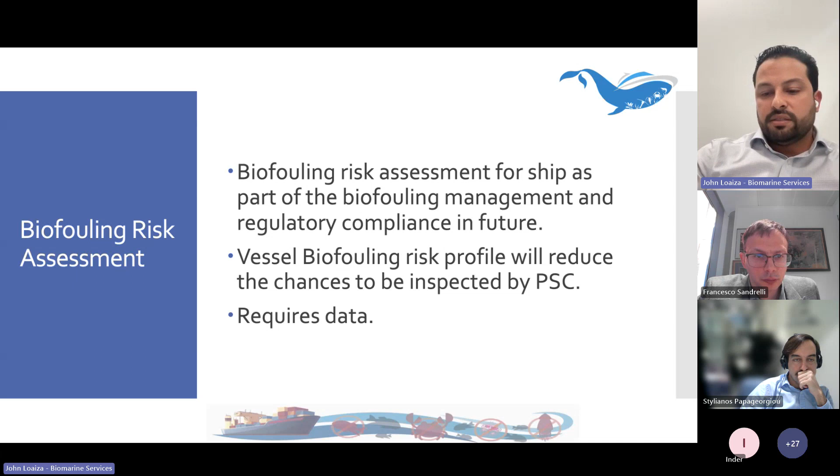What are the advantages and challenges? Determine the condition of the antifouling systems, such as coatings and marine growth prevention systems.

Ship-specific biofouling risk assessment to identify biofouling inspection sequencing. Doing this, the frequency of inspections for ships can vary depending on the conditions. So with our platform, between inspections we create data over time that allows change.

From reactive mode to a predictive mode, by analyzing the patterns of biofouling growth, identifying which areas you need to focus on more to avoid biofouling growth.

This also provides ship owners and managers decision making and planning in advance on how to save fuel. That will be a biofouling predictive tool.

Also, it helps identify unexpected mechanical damage during the inspection, and reducing biofouling with very good biofouling management can help achieve emission targets. There is use of blends and new fuels, and that will raise the fuel cost in the near future.

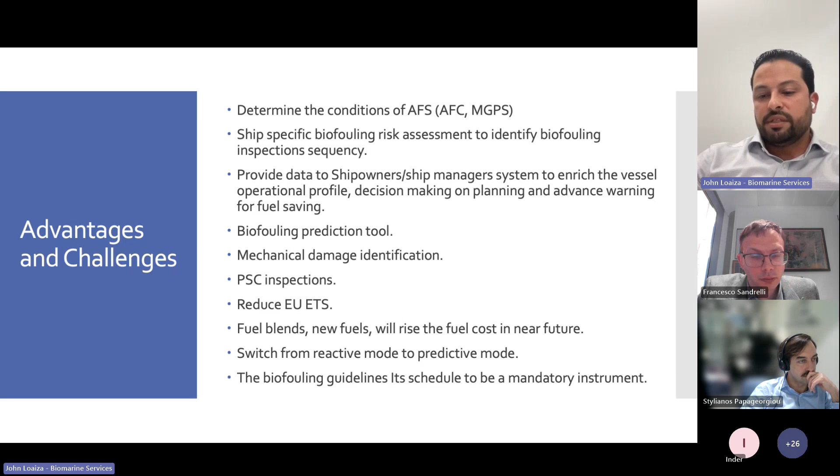That's for me. Any questions? Happy to share.

Thank you so much, John, and thank you so much to all the speakers for the three presentations. They were all very interesting presentations. I'm going now to open the floor to questions.